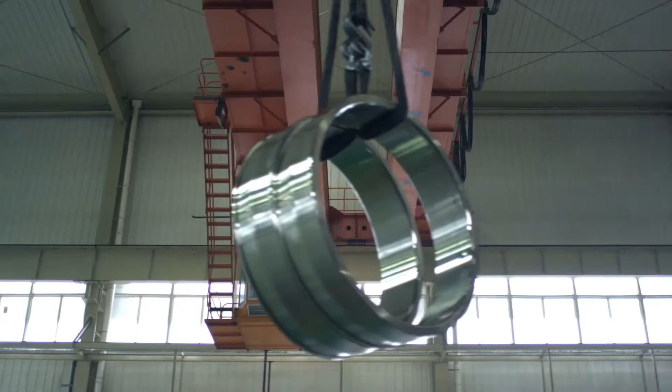Rotating China, empowering the world.

In 1954, a super enterprise producing bearings was born. This giant rewrote the history of the Chinese bearing industry.

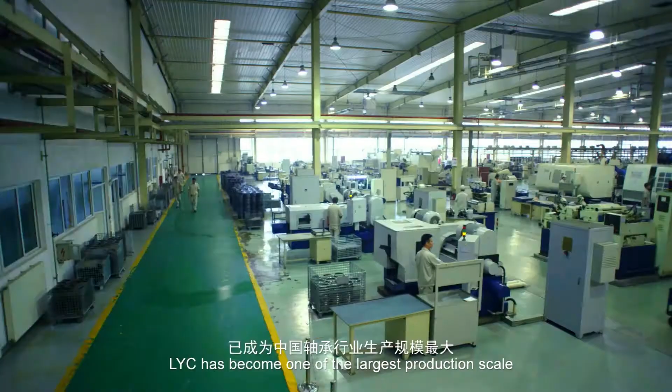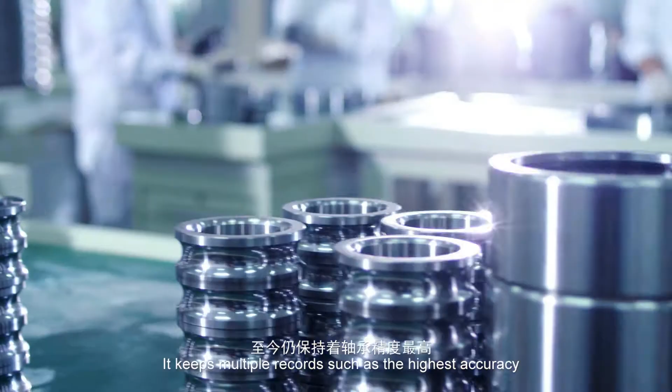LYC. Through 60 years of development, LYC has become one of the largest in production scale and strongest in service capacity among bearing enterprises in China. It keeps multiple records such as the highest accuracy, the most complex structure, and the largest dimension in China's bearing industry. For 60 years, LYC has always stuck to the development of innovation, obtaining outstanding achievements in the bearing industry.

From highway to railway, from land to ocean, LYC leads the revolution and development of the Chinese bearing industry. History has witnessed the glory of LYC and the rising of a national industrial brand.

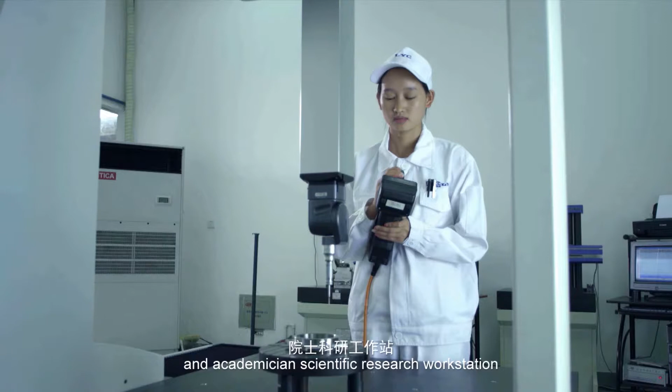LYC owns the first batch of national enterprise technical centers affirmed by China, ranking 58th throughout the nation. It has a postdoctoral scientific and academician research workstation, and has founded a complete experimental platform for research and development, all of which have formed a high-level expert team. Its multiple scientific research projects have been brought into national major scientific and technological projects, and so on.

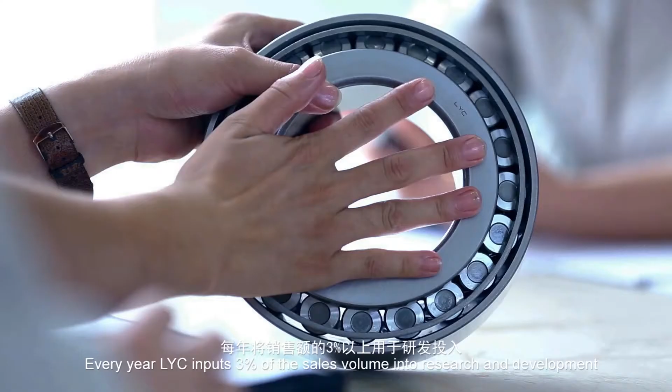Every year, LYC inputs 3% of its sales volume into research and development. It has 430 authorized patents, including 62 invention patents, and has formulated 48 industry standards, setting up the strongest R&D team in China's bearing industry. LYC has passed ISO 9001 certification and ISO 14001 certification as a whole.

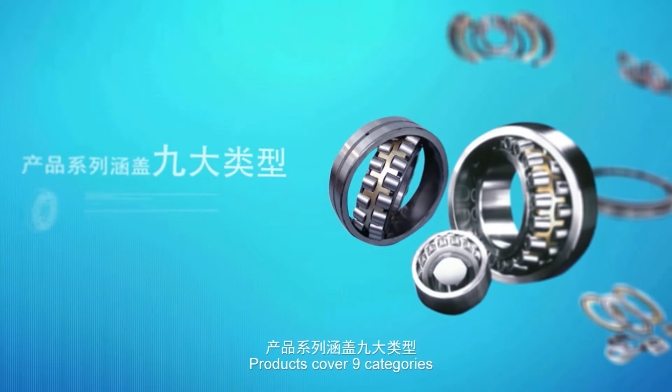Products cover 9 categories, including more than 15,000 types. Product sizes range from an inner diameter of 10 mm to an outer diameter of 13,500 mm.

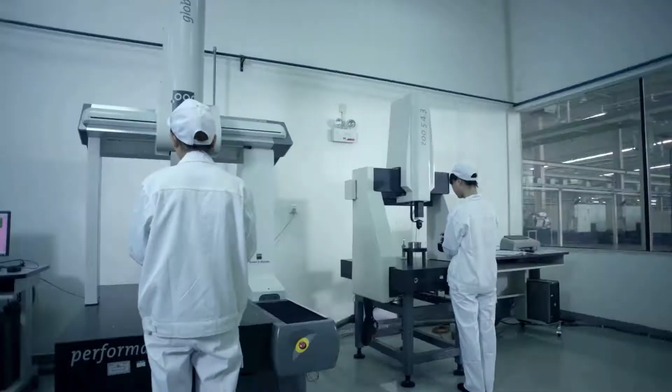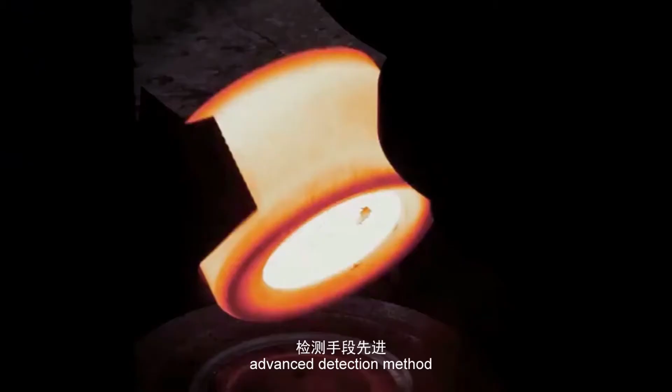LYC owns internationally leading instruments for scientific research, with strong technological ability, excellent processing equipment, a complete quality assurance system, and advanced detection methods. Each procedure from raw material to finished product can be controlled accurately and meticulously.

It has established the first PDM management system in the Chinese bearing industry, and has independently developed a rolling bearing three-dimensional computer-aided design system, RBDS-VER 5.0. Through a series of asset, technology, brand, and other optimization and integration strategies, LYC has formed a clustering area of 6 major industries and 7 major modules.

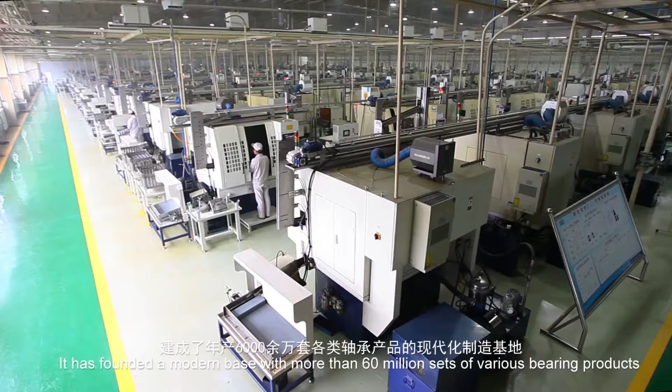It has founded a modern base with more than 60 million sets of various bearing products, forming a batch of superior product groups with high technical content, high value added, and high precision.

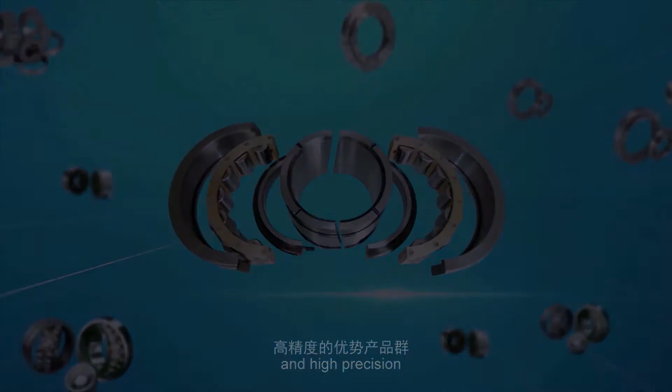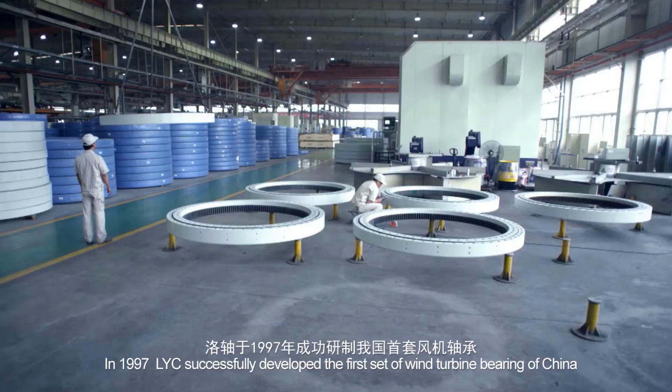In 1997, LYC successfully developed the first wind turbine bearing in China, starting the precedent of wind turbine bearing localization. In 2012, LYC drafted and formulated the national standard for rolling bearing wind turbine yawing, pitch, and main shaft bearings, enacting industry standards for bearing specification and unifying wind turbine design, making, inspection, and acceptance.

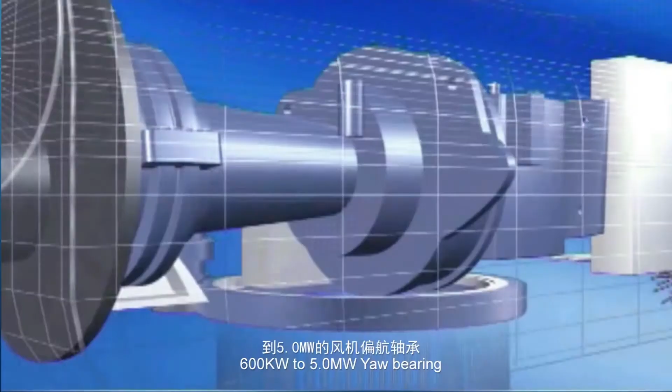At present, LYC has developed and produced, from 600 kilowatts to 5.0 megawatts, yaw bearings, pitch bearings, main bearings, gearbox bearings, and actuator bearings to support many domestic and overseas famous wind turbine manufacturers.

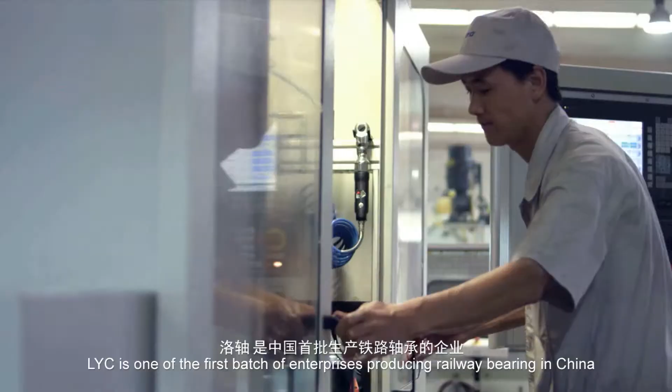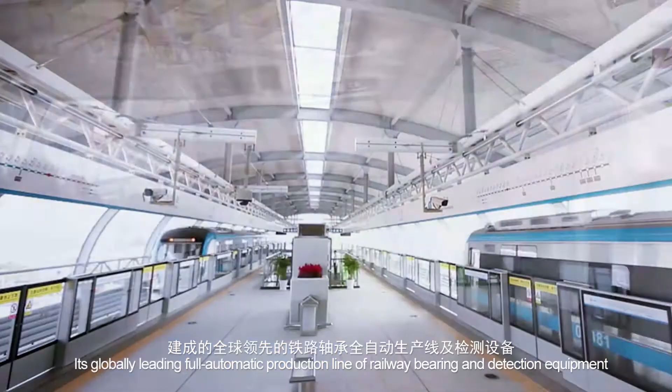LYC is one of the first batch of enterprises producing railway bearings in China. Its products are widely used in high-speed railway, quasi bullet trains, lorries, locomotives, city subways, and light rail trains. Its globally leading fully automatic production line of railway bearings and detection equipment guarantees the product's stability and reliability.

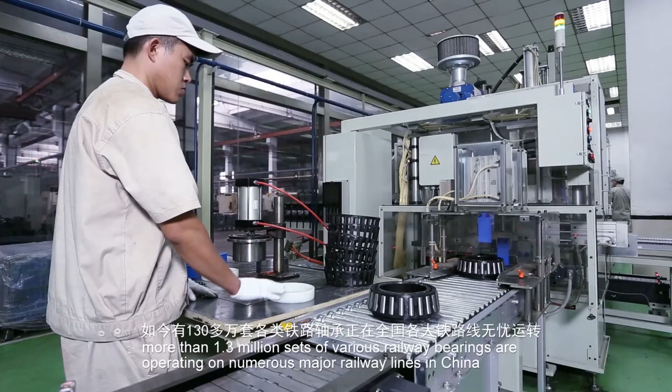More than 1.3 million sets of various railway bearings are operating on numerous major railway lines in China. Meanwhile, they are being exported to North America and Europe.

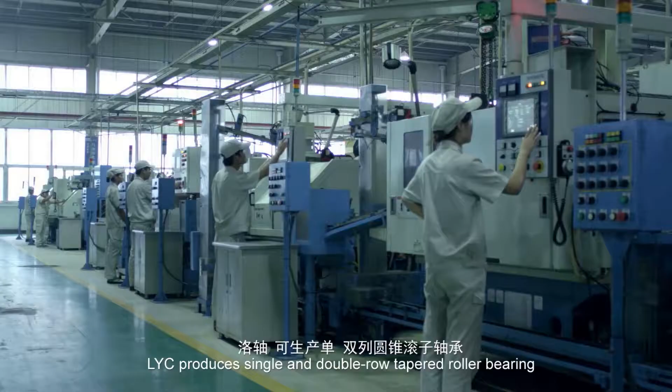LYC produces single and double-row tapered roller bearings, ball bearings, cylindrical roller bearings, needle bearings, and hub unit bearings. Its automobile bearing production line has passed TS16949, QS9000, and VDA 6.1 quality system certification.

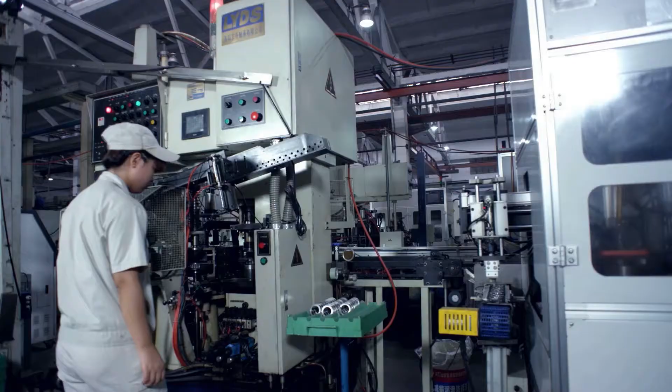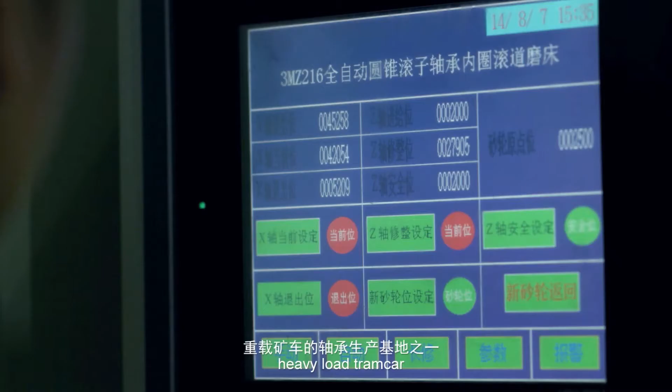It is at present one of the largest domestic production bases producing bearings for motorcycles, limousines, minicars, commercial vehicles, pickups, light and heavy-duty vehicles, engineering machinery, and heavy load tramcars. Products have been supplied to more than 100 automobile and parts manufacturers.

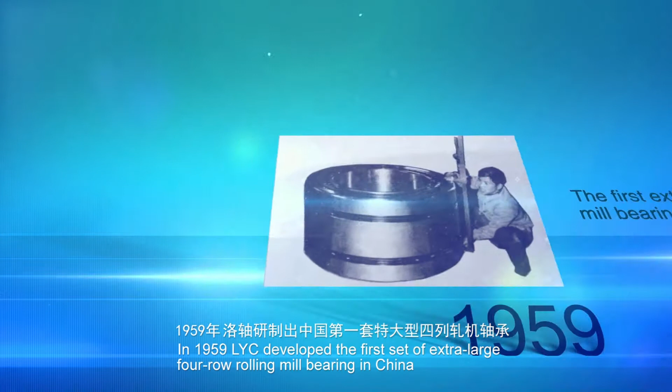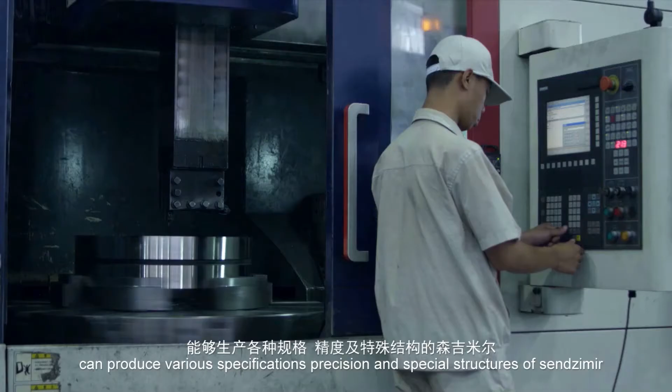In 1959, LYC developed the first extra-large 4-row rolling mill bearing in China, founding the rolling mill bearing industry. It has a production capacity of 23,000 sets of rolling mill bearings each year, producing various specifications, precision grades, and special structures, such as four-row tapered roller bearings, split bearings, and high-speed wire rod mill bearings.

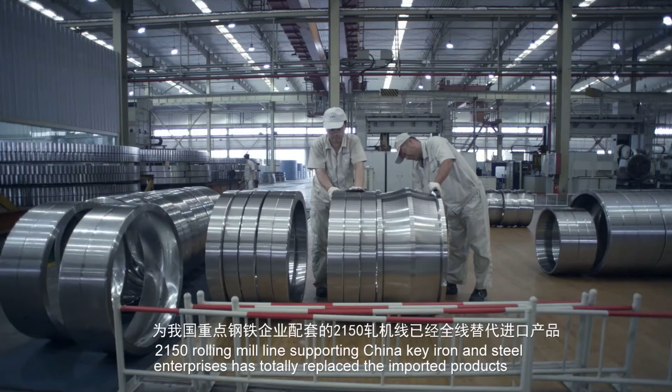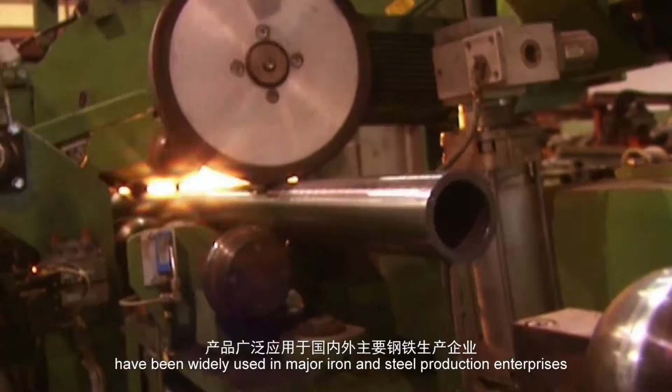The 2150 rolling mill line, supporting China's key iron and steel enterprises, has totally replaced imported products. More than thousands of supporting products have been widely used in major iron and steel production enterprises, designing institutions, and rolling mill production enterprises.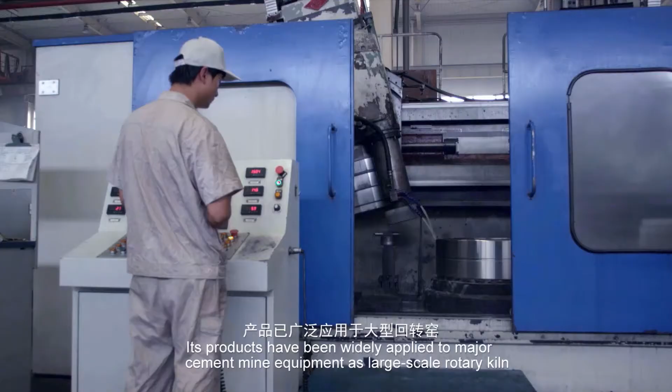LYC owns the most advanced cement and mining bearing production and detection equipment in China at present, which guarantees the stability and reliability of products. Its products have been widely applied to major cement and mining equipment such as large-scale rotary kilns, raw material grinding machines, vibrating screens, and roller presses.

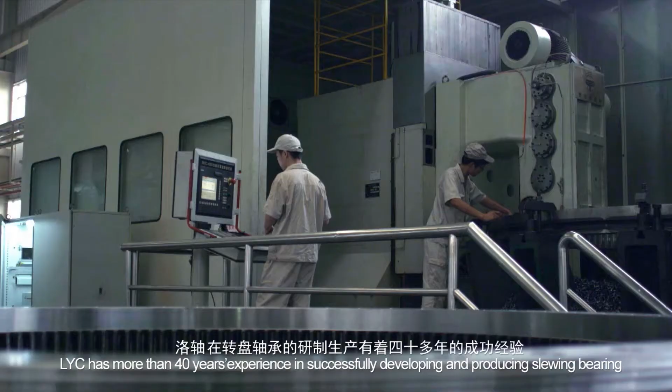LYC has more than 40 years' experience in successfully developing and producing slewing bearings. It has also taken charge of formulating Chinese slewing bearing industry standards.

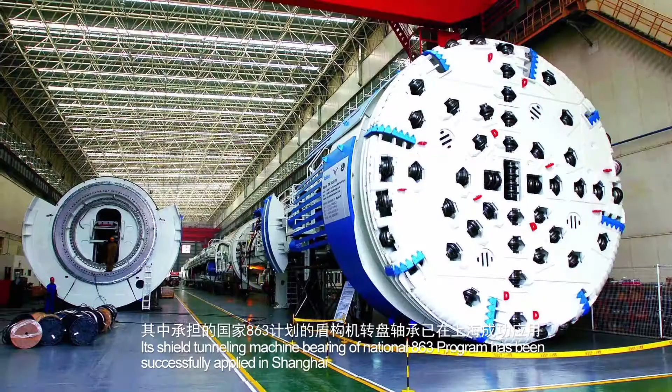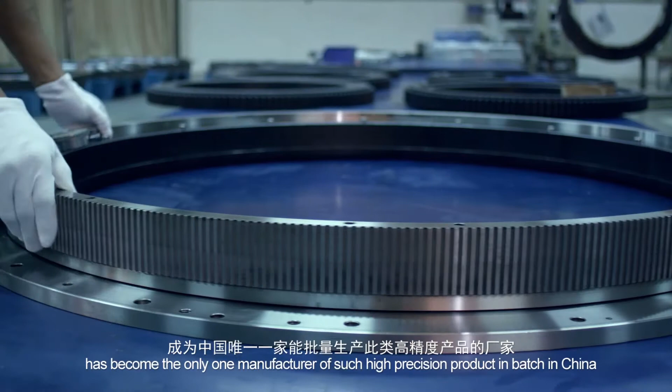Its shield tunneling machine bearing under the National 863 program has been successfully applied in Shanghai. The precision turntable bearing for spiral CT machines, produced in batch since 2004, makes it the only manufacturer of such a high-precision product in batch in China.

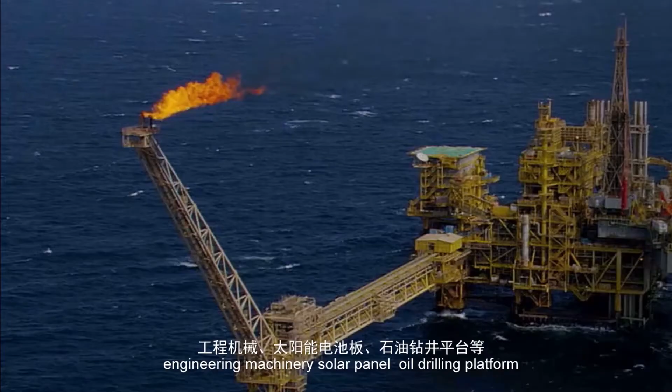LYC slewing bearings have also been widely used in ship cranes, hoisting machinery, auto cranes, tower cranes, engineering machinery, solar panels, and oil drilling platforms. In April 2014, it produced split slewing bearings with an outer diameter of 11 meters, breaking the record for the largest bearing in China again.

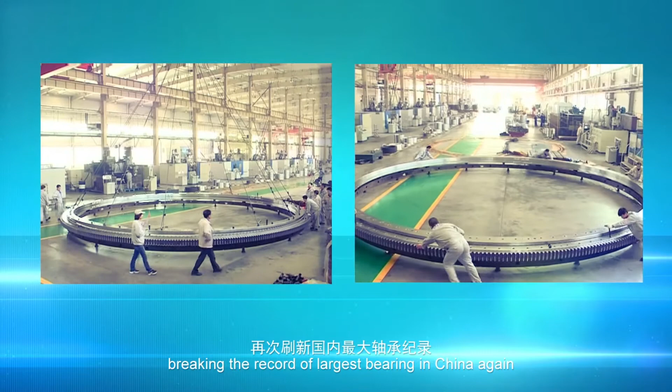LYC products have also been widely used in electrical machines, industrial gear cases, printing machinery, textile machinery, and petroleum machinery.

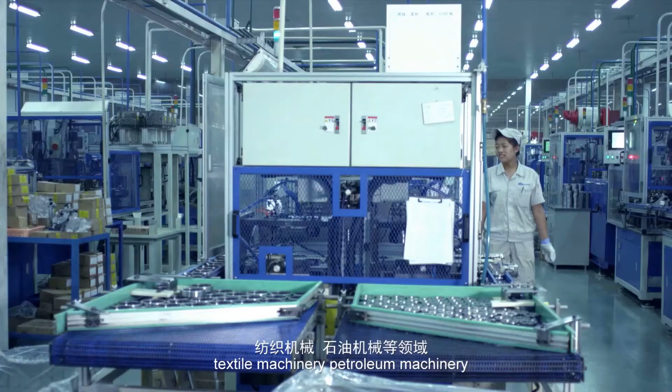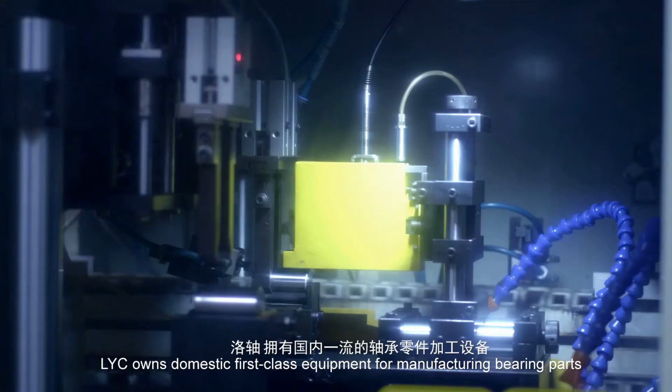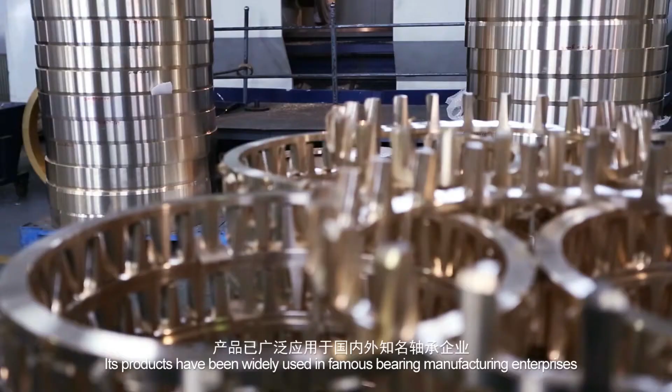LYC owns domestic first-class equipment for manufacturing bearing parts. It provides users with different specifications of rings, rollers, and cages. Its products have been widely used by famous bearing manufacturing enterprises.

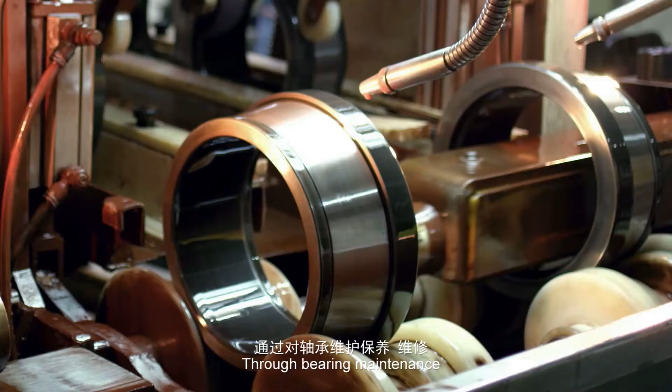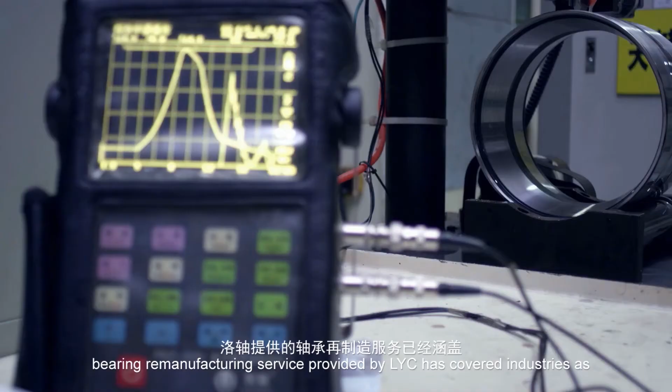LYC has accumulated more than 30 years' experience in remanufacturing bearings. Through bearing maintenance, it extends the service life to the limit and reduces production and operation costs for customers. At present, bearing remanufacturing service provided by LYC has covered industries such as cement, hoisting machinery, smelting, machine tools, and railway.

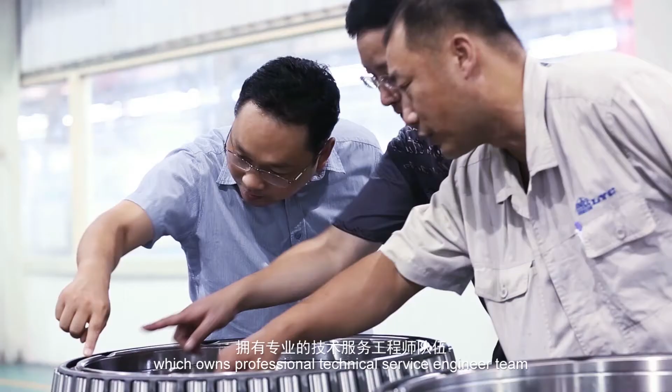LYC has established the first domestic bearing service platform, which owns a professional technical service engineer team. It provides services such as technical consultation, failure analysis, and fault detection. It owns the best marketing and service network in the domestic bearing industry.

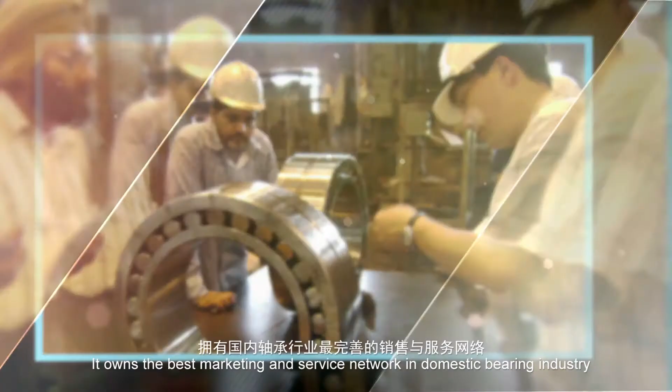Overseas, it has more than 20 distributors and branch companies. Its products have found markets in more than 70 nations. In China, it has more than 50 sales offices and more than 300 sales dealers.

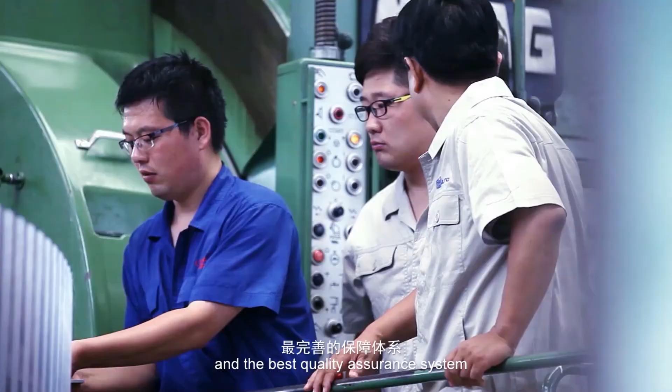With the most intensive service network and the best quality assurance system, LYC is creating maximum value for customers and leading the service trend in the industry. LYC is stepping towards the ambitious goal of being number one in China, first class in the world.